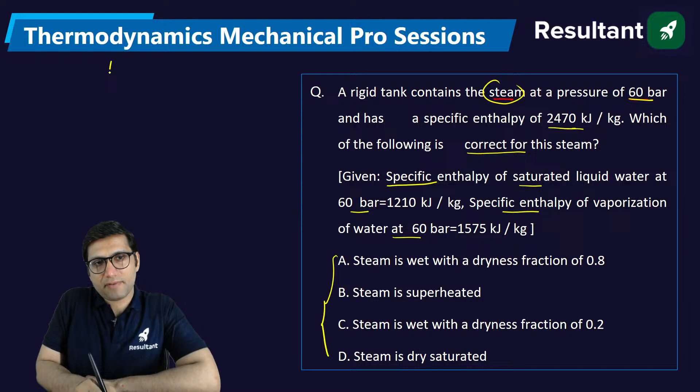First of all, we need to understand that we have a tank, and that tank is containing steam at a pressure of 60 bar, and the total enthalpy of the steam is also given at this pressure, 2470 kilojoule per kg. But at the same pressure of 60 bar, as you can see, the specific enthalpy is also given for liquid and the specific enthalpy of evaporation. If these two data are available for you, that means we are talking about wet steam.

And the total enthalpy of the wet steam is given. So just apply this formula: total enthalpy is equal to enthalpy of the liquid plus X into HFG. This is the formula. With the help of this formula, you can get the value of dryness fraction. This is called dryness fraction.

2470 is equal to 1210 plus X into 1575. By solving this, you will get the value of X. X is called dryness fraction. And one thing is sure, that this is a wet steam.

This is not superheated and neither is it dry saturated, because dry saturated steam has dryness fraction equal to 1, and that is definitely not possible here. And superheated steam is not there because they have given this data. So find the dryness fraction. How much will it be? If you solve it, you will get 0.8. So the answer is coming out to be this.

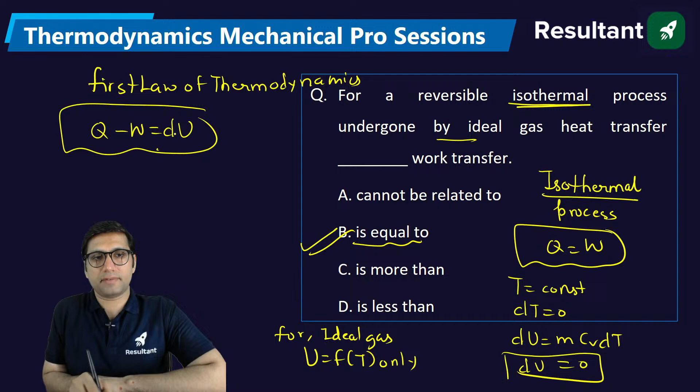Now from first law of thermodynamics, Q minus W is equal to dU. By using this first law of thermodynamics, we can say that if this is 0, then heat transfer is equal to work transfer.

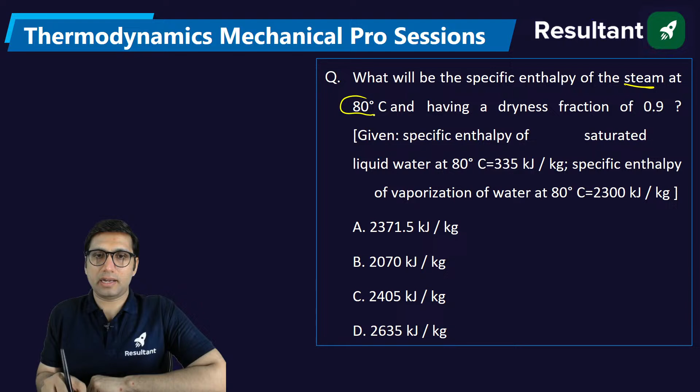Next question. What will be the specific enthalpy of the steam at 80 degrees Celsius and dryness fraction 0.9? At this same temperature, 80 degrees Celsius, specific enthalpy of saturated liquid is 335 and specific enthalpy of vaporization, HFG, is equal to 2300.

By using this data, can you just let me know the value of specific enthalpy of wet steam? It is HF plus X times HFG. Same formula that we have discussed, right? 335 plus 0.9 into 2300. Put the values, you will get the answer. Tell me what answer you are getting.

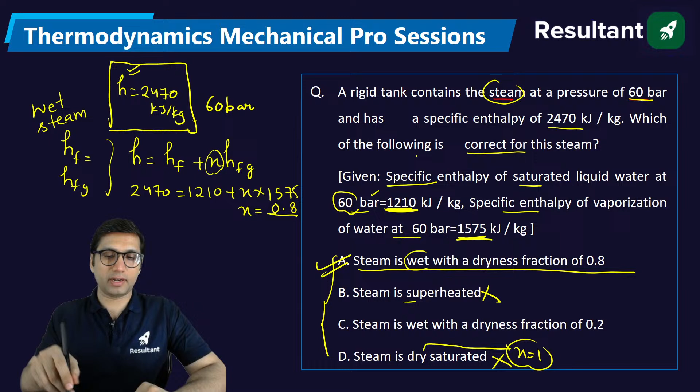Well, if you solve this, you will get a value around 2405 kilojoule per kg. A similar type of question we have discussed here. See, in both questions the same formula has been used. The only difference is what each one is asking.

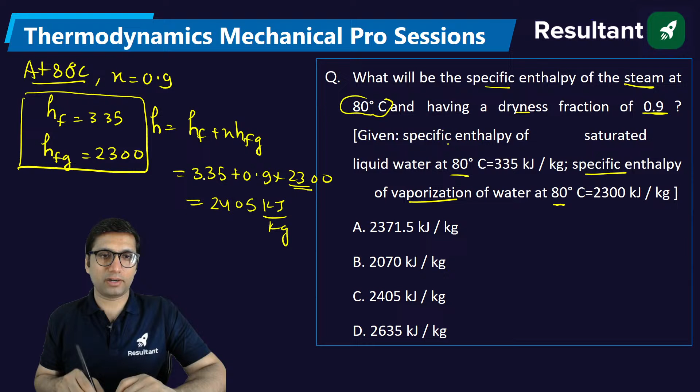2305 is not correct, Gaurav. It will be 2405. Please solve it correctly. It is already 2300. So if you multiply by 0.9 and add to 335, you will get 2405.

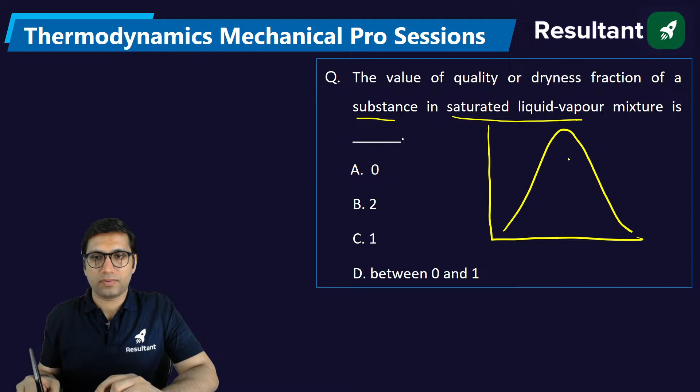The value of quality or dryness fraction of a substance in saturated liquid vapor mixture. This region is called the saturated liquid plus vapor mixture region. You have to tell what the dryness fraction will be.

Because this is called wet region, for the wet region or saturated liquid vapor mixture region, the dryness fraction is greater than 0 and less than 1, that means between 0 and 1. And this line is saturated liquid line.

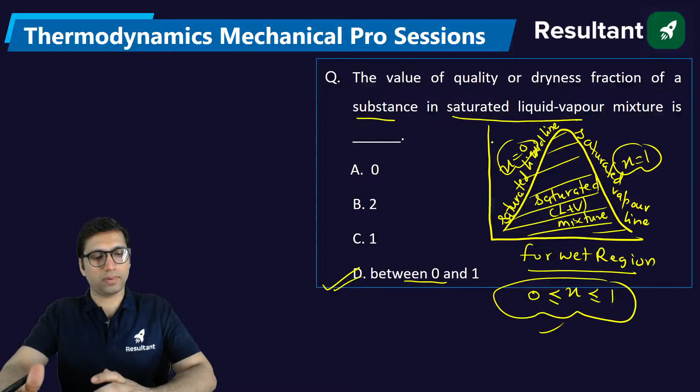This is saturated liquid line. This is saturated vapor line. On the saturated vapor line the dryness fraction is equal to 1 and on the saturated liquid line the dryness fraction is equal to 0. So this question can be asked in the exams about the dryness fraction.

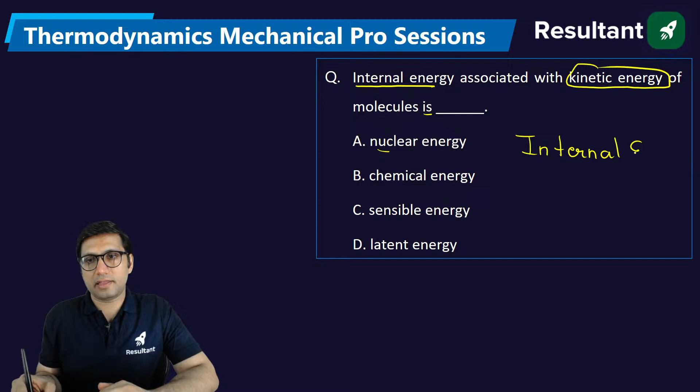Next question: internal energy associated with kinetic energy of the molecules is a form of nuclear energy, chemical energy, sensible energy or latent energy. First of all, what is internal energy? Internal energy is also called microscopic form of energy, right? It is microscopic energy.

But we need to understand one thing. If it is microscopic energy, then it is also called energy possessed by individual molecules. The energy possessed by each individual molecule is called internal energy, and in that we have different forms of energy. We have sensible, chemical, nuclear, right?

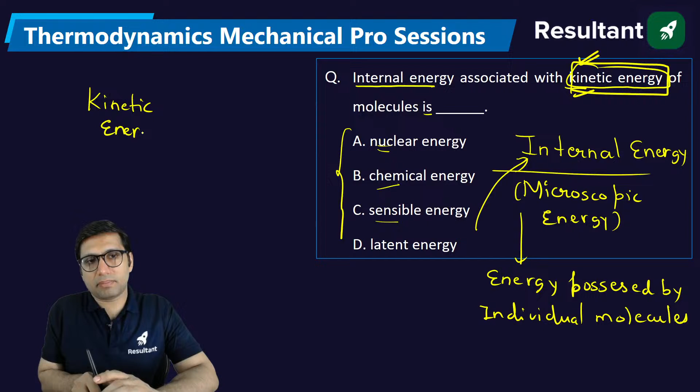But here it is asking for the one which is associated with kinetic energy. All these energies are forms of internal energy. They all come under internal energy. But related to kinetic energy, when we say kinetic energy of the molecule, then kinetic energy of the molecule is 3 by 2 kB into T.

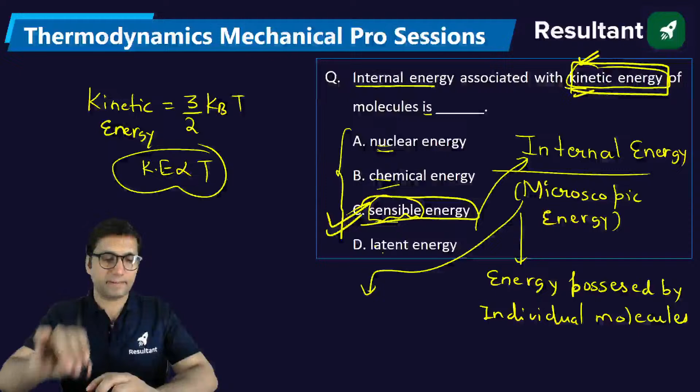Kinetic energy of the molecule is proportional to temperature, and temperature or temperature difference is basically called sensible energy. The reason is that internal energy associated with kinetic energy of the molecule is sensible energy, because internal energy can be of different forms - nuclear, chemical, sensible, latent - but the part related to kinetic energy will be sensible.

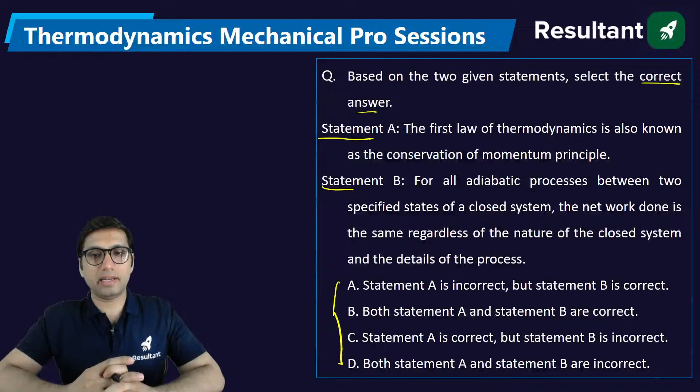There are 4 answers given here. The first says statement A is incorrect but statement B is correct. First law of thermodynamics is conservation of momentum - absolutely not, so the first statement is incorrect.

This is correct. Now you must be saying, sir, please check the second one. For all adiabatic processes between two specified states of a closed system - let's see that. Now we know that for an adiabatic process, heat transfer is equal to 0.

So work transfer will be equal to minus of dU, it will depend on internal energy change. It only depends on the initial and final internal energy, doesn't matter - although work is a path function, only for adiabatic process does it depend on a quantity which is not a path function, it is a point function. So this statement is correct, that net work done will be same regardless of the nature and detail of the process, only for adiabatic process.

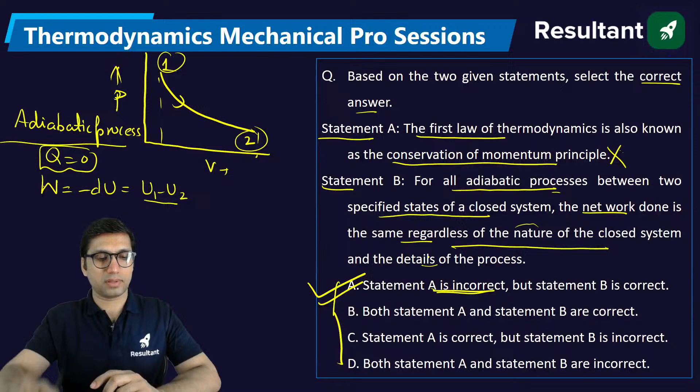An ideal gas thermometer based on this is called a constant volume gas thermometer. What do you mean by constant volume? That is, when volume is constant, pressure will be directly proportional to temperature.

So as per this we can say that the pressure of the gas at temperature equal to 0 degree Celsius is equal to P, and pressure at temperature equal to T degree Celsius is equal to P Tp. This is called the triple point, this is called the triple point scale.

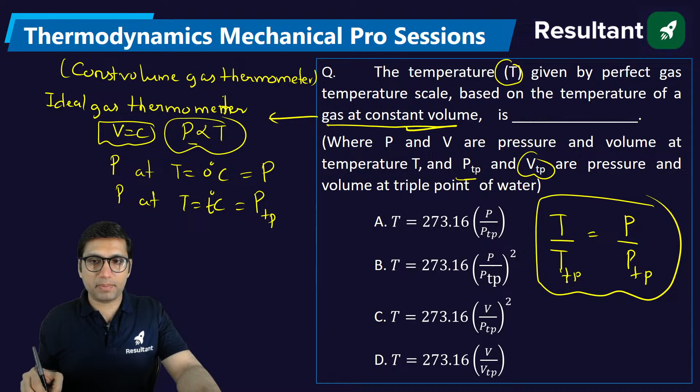Now at the triple point scale, you can relate this - we can say that pressure is directly proportional to temperature. So according to that, the temperature of the gas divided by temperature at triple point is equal to pressure of the gas divided by pressure at triple point. This will be the relation. Temperature at the triple point, T tp, means at triple point temperature is equal to 0.01 degree Celsius, which is equal to 273.16 Kelvin. Just put this value here, you will get 273.16 into P by P tp.

So the answer for this question will be option A. Those who have given option A as the answer for this question are absolutely correct.

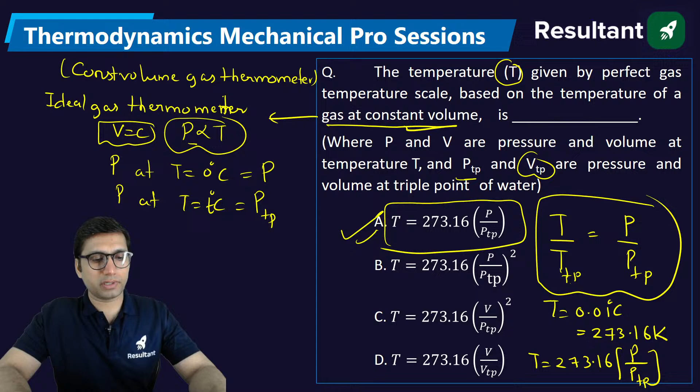Please make it bold, sir, it's not clear, it's not clear. Is it not clear? Gautam? I don't think it's not clear. What is not clear here - whatever I am writing, or whatever is written here, what is not clear?

First of all, we need to find the maximum work obtainable. We have a body which is at 600 Kelvin.

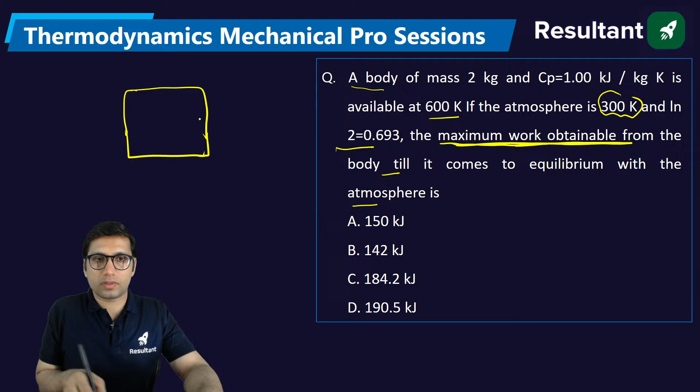The questions should be bold. I will try to make the questions bold, no problem. Kuldeep, good evening, welcome to the session.

This body is at 600 Kelvin, and the atmosphere around it will have a temperature of 300 Kelvin.

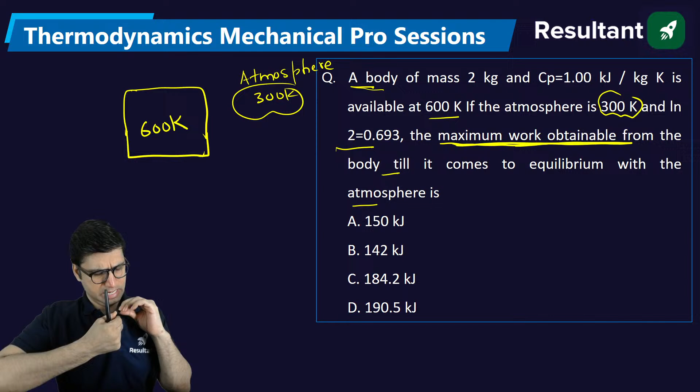After 23 minutes of session you are saying sound is less. Let me check. Is it less sound? Tell me.

So tell me what will happen to this body. This body will definitely lose heat. Body will lose heat to the atmosphere. Your body will get cooled down, right?

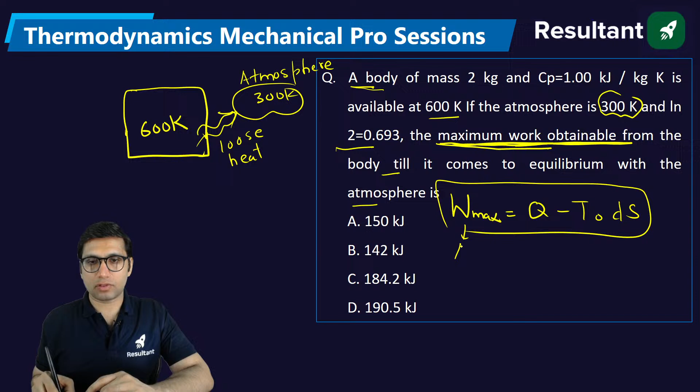Maximum obtainable work, maximum work is equal to Q minus T naught into ds. You must be thinking, sir, what is this formula or how have you applied this formula? I have applied this formula because this is the formula we apply here. This is the formula for maximum work, which is also called available energy. Available energy is equal to Q minus T naught into ds.

Because the body is a solid body, and for solids, entropy change of solids and liquids can be found by using this formula: m into specific heat, mass into specific heat, log of T2 by T1.

Although it should be T2 by T1, but since the body is losing heat, it will become T1 by T2. Here T1 is equal to 600 and T2 is equal to 300. But since the body is losing heat, there will be a minus sign, and the minus sign will go inside, so it will become T1 by T2.

And what is Q? Q is equal to MC into T2 minus T1. It should be T2 minus T1, but it will become T1 minus T2. So we can write MC into 600 minus 300, minus T naught into MC log of 600 by 300.

Clear? Now if I take MC common outside, you will get what? Tell me, it will be 300 minus, what is T naught? T naught is the surrounding temperature. This is 300 log 2. Clear? Mass is 2, Cp is 1. So just 2 into 1, 300 minus 300 into 0.693.

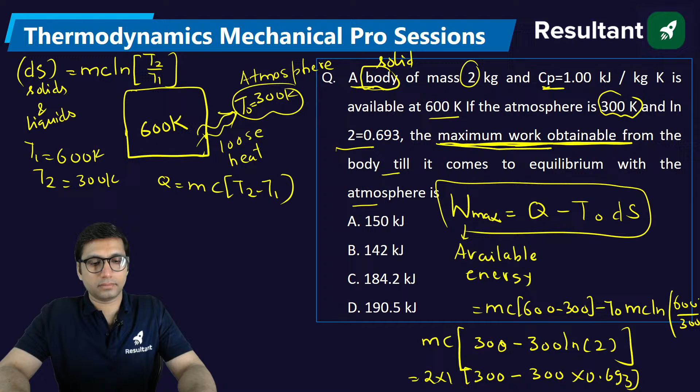Solve it and tell me the answer. Okay, if you solve it, you will get 184.2. Are you all getting this value? 184.2. Clear?

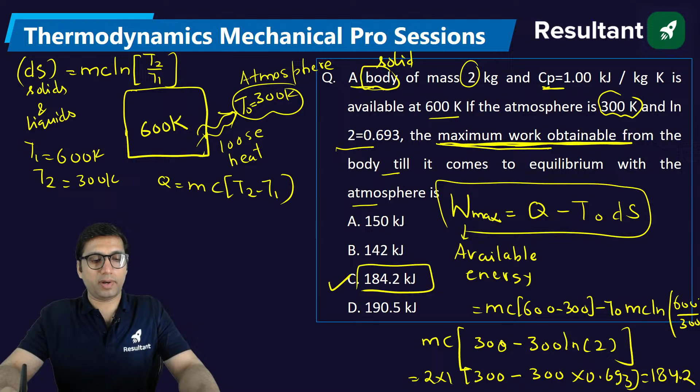Next, the equation which forms the basis of the Mollier diagram. First of all, what is the Mollier diagram? It is an enthalpy-entropy diagram. It is a plot between enthalpy and entropy, like this.

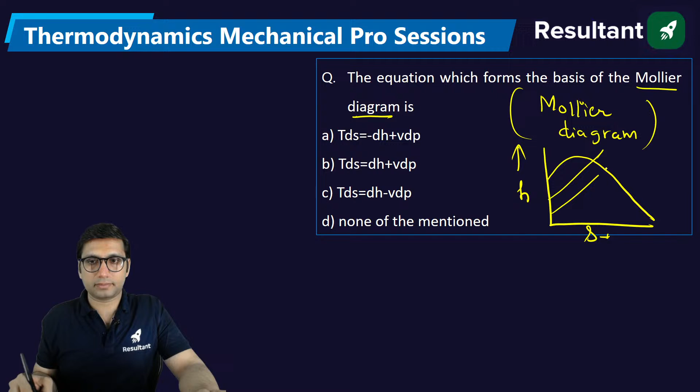One thing about the Mollier diagram is, the slope of the Mollier diagram is... what is the meaning of slope of a curve? It is change in the y-axis and x-axis. This at constant pressure is equal to absolute temperature. This is called the slope of the Mollier diagram.

But how? What is the meaning of the equation which forms the basis of the Mollier diagram? That means this slope, this relation, which of the following equations will give you this relation? This is the equation: TdS is equal to dH minus VdP. How? If we use this equation, TdS is equal to dH minus VdP.

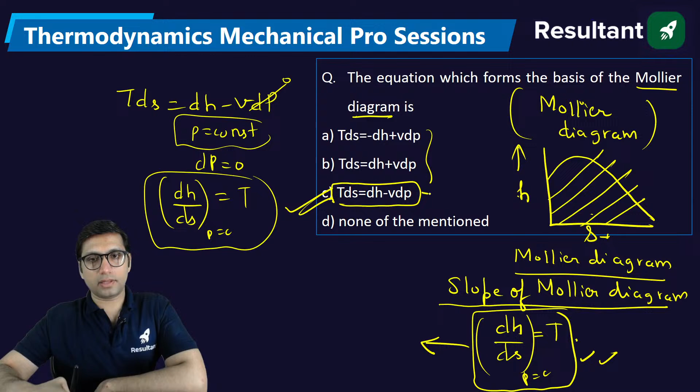If I take constant pressure, for constant pressure, change in pressure equals 0. If this becomes 0, we can say dH by dS at constant pressure is equal to T, where T is absolute temperature. So the relation which is the basis of the Mollier diagram, this slope, you get by using this TdS equation. It is also called the TdS equation.

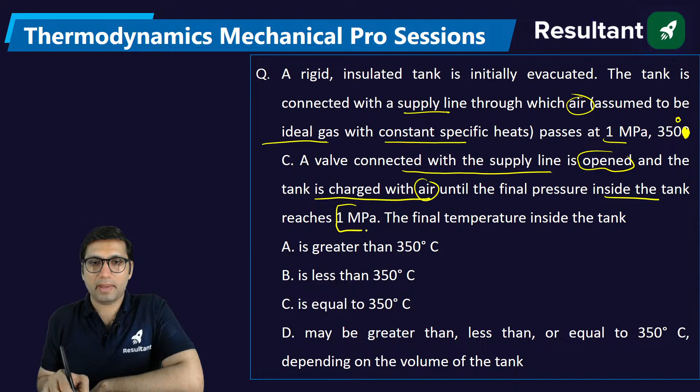A rigid insulated tank is initially evacuated. The tank is connected with a supply line through which air, which is assumed to be an ideal gas with constant specific heat, passes at 1 megapascal, 350 degrees Celsius. A valve connected with the supply line is opened and the tank is charged with air until the final pressure inside the tank is 1 megapascal, same as the initial pressure. You have to tell what is the final temperature inside the tank.

Will it be greater than 350 degrees Celsius? Will it be less than 350, equal to 350, or may be greater than, less than, or equal to 350, depending on the volume of the tank?

First of all, this case having a rigid insulated tank, initially evacuated, and asking the final temperature, this is a case of unsteady flow, and in unsteady flow it is a case of charging of a tank. If you have studied this topic, when the charging of tank is there, charging of an evacuated insulated tank...

Then the final temperature will of course be gamma times the initial temperature. Gamma is 1.4. If not given, you can take 1.4. So whatever the initial temperature, the final temperature will be more than the initial temperature. It will be greater. Clear? Clear, everyone?

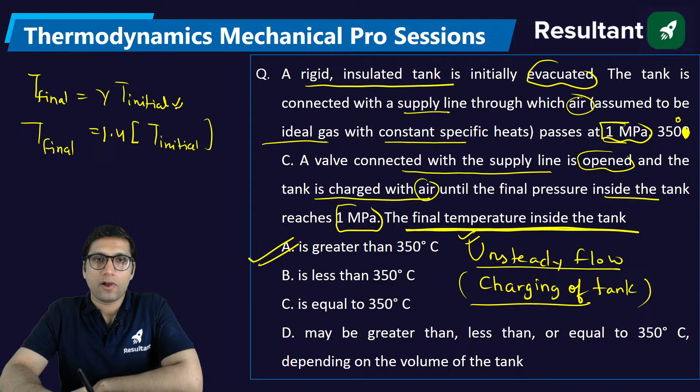So this equation, I think you must have studied the final equation for charging of a tank, an insulated evacuated tank - this will be the answer.

For an ideal turbine, enthalpy of the gas at entry and exit is 3000 and 2500 respectively, having velocity of 200 and 100 at entry and exit. If the mass flow rate of the gas is 30, the approximate power output of the turbine is?

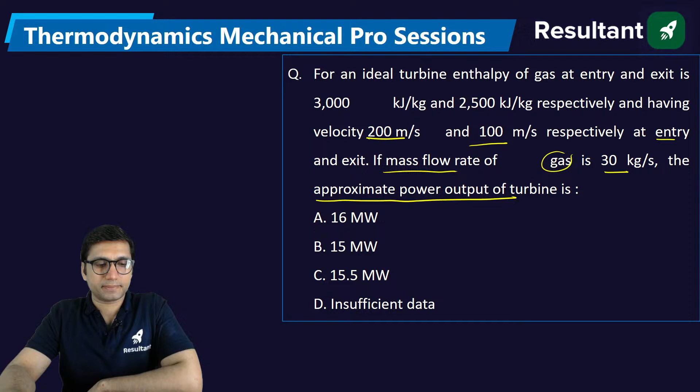How are you going to solve this question? Because the turbine works under steady state condition, we'll apply the steady flow energy equation.

A steady flow energy equation, if you apply, it is m*h1 plus v1 square by 2000 plus g into z1 by 1000 plus q is equal to m*h2 plus v2 square by 2000 plus g into z2 by 1000 plus w.

So if you just put the values here, this will be m(h1 minus h2) plus (v1 square minus v2 square) by 2000 is equal to power output.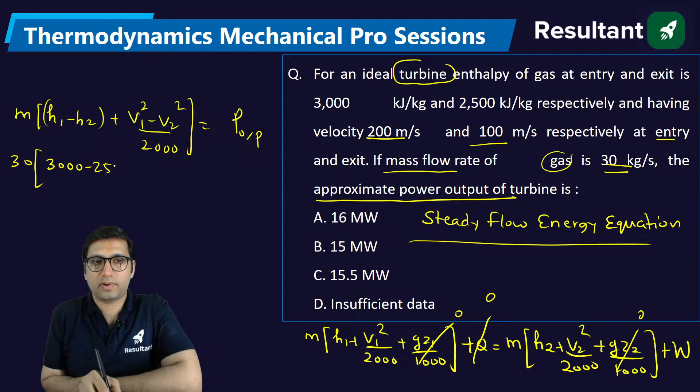Just put the values which are given here: this is 30, this is 3000 minus 2500, plus 200 square minus 100 square by 2000.

Solve it, you will get the answer - you will directly get power output. Tell me what answer you are getting. Some of you are saying 15.5. Yes, 15.5 is the answer.

So the power output will come out to be 15450 kilowatt, or 15.45 megawatt, approximately 15.5 megawatt. Clear? Is it clear to all of you?

These kinds of questions you can expect in your RRB JE or SSC JE CBT 2.

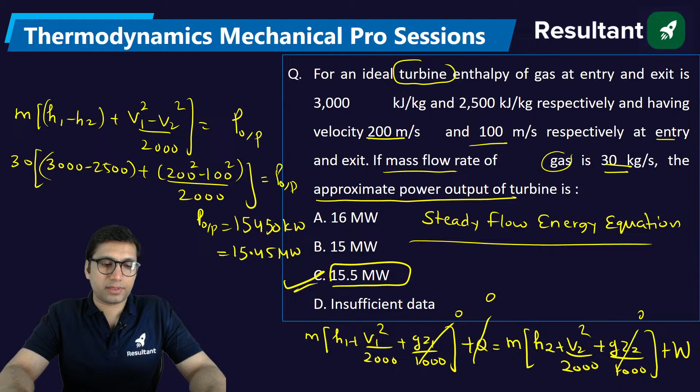A real gas as compared to an ideal gas at very high pressure occupies - more volume, less volume, same volume, or will it show unpredictable behavior?

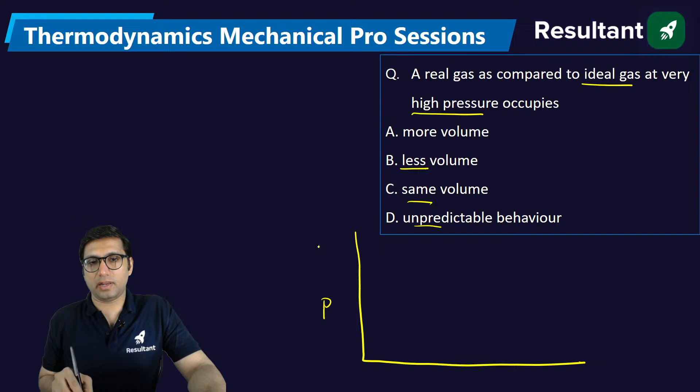So there is a graph plotted between real gas and ideal gas. The graph is somewhat like this - there is one curve for ideal gas, and this other curve is plotted for real gas.

Now there is a curve of pressure and volume. Tell me, at high pressure - this is the region of high pressure - if you draw a vertical line, this will be the volume of real gas, and this will be the volume of ideal gas. At high pressure, which has more volume? The volume of real gas will be more than the volume of ideal gas at high pressure. So, real gas compared to ideal gas occupies more volume at high pressure.

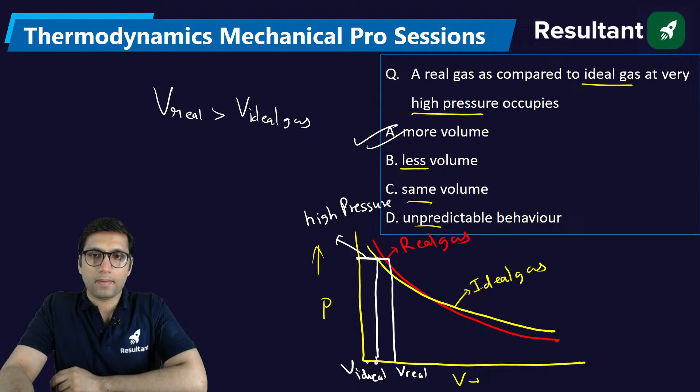A real gas undergoes an isothermal process. Which of these statements are true? Real gas undergoing an isothermal process, which is a constant temperature process - which of these statements are true?

For isothermal process, we know temperature is constant, so you would say temperature change will be 0, du will be 0, right? This is true for ideal gas - this whole story will be true for ideal gas, where heat transfer will be equal to work.

But what about real gas? Here they are saying real gas. For real gas, only one thing is true: real gas internal energy is a function of temperature and volume both, not just a function of temperature. So we cannot say that du will be 0 - du will not be equal to 0.

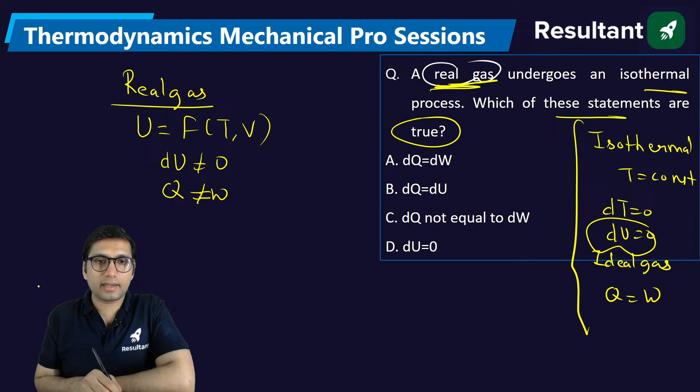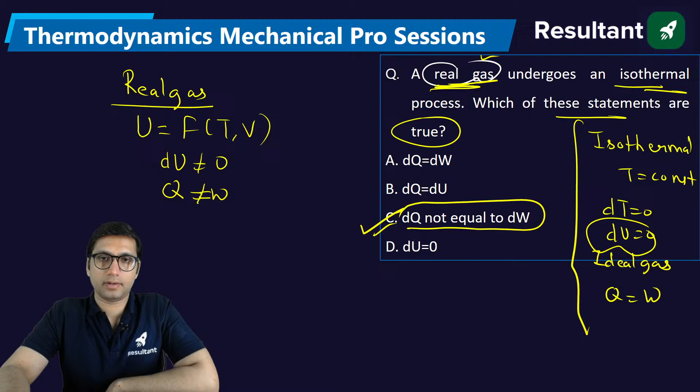And if that is the case, then heat transfer will not be equal to work transfer. But one thing we can say out of the options given is: heat transfer will not equal work transfer for a real gas under constant temperature process. For ideal gas, this should have been true, but for real gas, this is not true. So the only correct option here is option C. Is it clear to everyone?

Which of the following statements is incorrect with reference to the first law of thermodynamics? You don't have to tell the correct one, you have to tell the incorrect one.

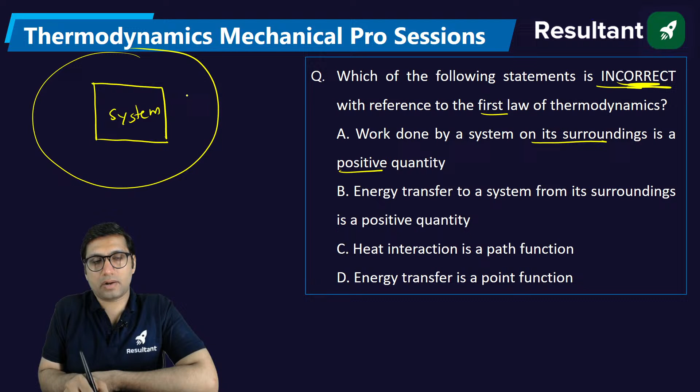If you see the option A, work done by a system on surrounding is positive. When the system does work on the surrounding, it is a positive value. This is a system, and outside the system is surrounding. If the system does work on surrounding, it is positive work. Work is positive. Correct. This is correct. But you have to tell the incorrect.

Energy transferred to a system from its surrounding is a positive quantity. Okay, this is also correct. When we say energy transfer, see, energy transfer can be heat transfer, work transfer, both. But here it is to a system from surrounding. Okay, when we say energy in transit, there are two types of energy that you study, that is heat and work.

And these energies in transit, heat and work, cannot be point functions. They are not point functions. They are path functions. Heat and work are path functions. Okay. So this statement is not correct. They are asking about the incorrect. So that is not correct. Okay.

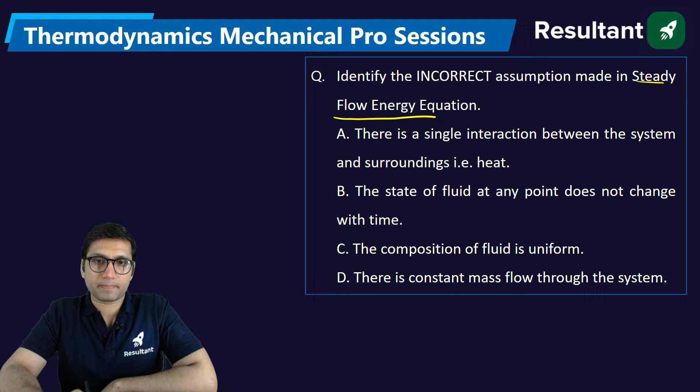Identify the incorrect assumption made in steady flow energy equation. Steady flow energy equation you must have studied. There is an equation which we have used in the previous question, I think, to solve a question on turbine. Identify the incorrect assumptions made in steady flow energy equation. There are two major assumptions that we use.

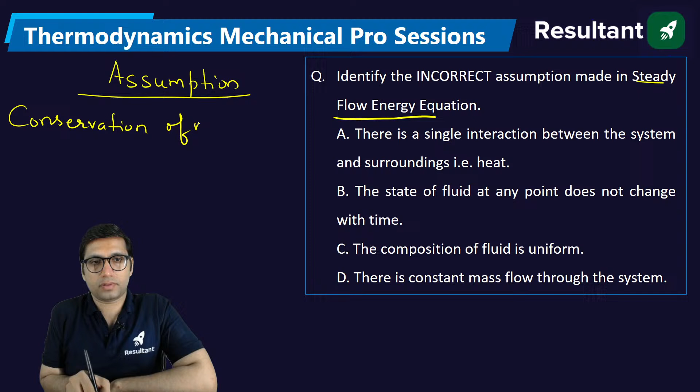One assumption that we use is conservation of mass. Mass is conserved. This is one assumption. And second is conservation of energy. This is the second assumption that we use for steady flow energy equation. These are the two important assumptions. But you have to tell the incorrect. There is a single interaction between system and surrounding, that is heat. This is a wrong statement, because it's not that there is just a single interaction. Okay. All right.

So Pradeep, we can discuss about that. We can discuss privately. You are asking about a private job. We can discuss it privately, because here I am teaching the students to prepare for government jobs. So if you have any such plan to get into a private job, then we can discuss this privately. There can be many depending on where you want to work, what your qualifications are, and what your areas of interest are.

Okay. This is a single interaction between system and surrounding. No, there can be two interactions, heat and work. It is not that system and surrounding can interact only by heat. There can be work interaction also. Okay. The state of the fluid at any point does not change with time. This is the assumption of steady. In steady flow, this is exactly what steady means. The meaning of steady is that

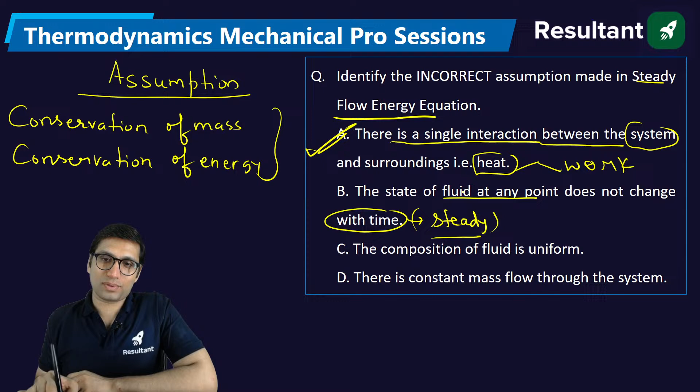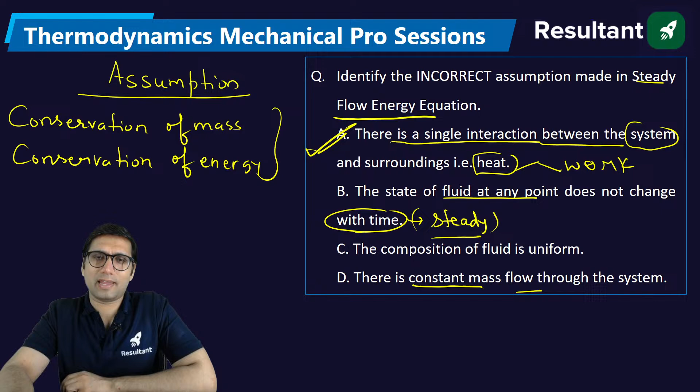Okay. So the state of the fluid at any point does not change with time. A constant mass flows through the system. Yes, conservation of mass, conservation of energy, and steady state conditions. And all types of interaction can take place. It's not just heat and work. There can be enthalpy change, there can be internal energy interaction.

Okay. Which of the following statements is false about constant volume gas thermometer? Constant volume gas thermometer traces the increase in temperature with the change in pressure. Because we are saying constant volume gas thermometer, it will be based on Gay-Lussac law. And as per the Gay-Lussac law, if the volume is constant, the pressure will be directly proportional to temperature. Okay, so this is correct.

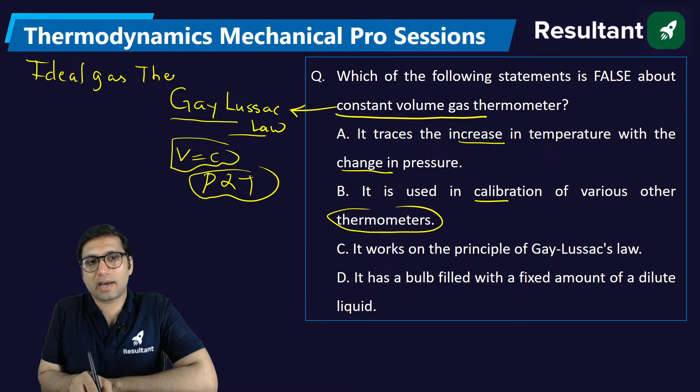It is used in calibration of various other thermometers. Yes, that is correct. Why? Because it is an ideal gas thermometer. And ideal gas thermometers give you correct readings, because they are based on an equation, they are based on a law. Because they are well calibrated, their reading is more accurate, so they can be used for calibration.

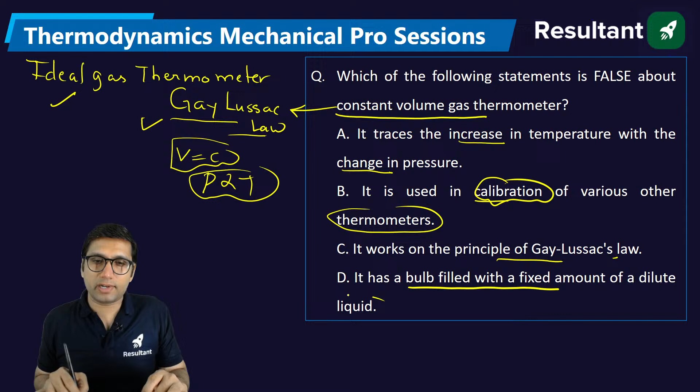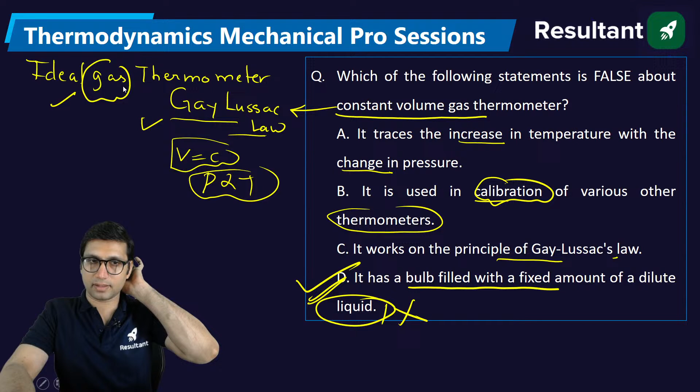Calibration means a standard to check the value. Suppose you have made a new thermometer, whether the value you get from it is correct or not can be checked using this thermometer, because this will give you the correct reading for sure. Okay. It works on the principle of Gay-Lussac, that is also correct. It is a bulb filled with a fixed amount of dilute liquid. No, it does not contain liquid. This is false, because it contains a gas, not liquid. It contains ideal gas. So this is the wrong statement.

Which of the following is a required condition for heat to be transferred across a boundary? Heat to be transferred across a boundary, internal energy.

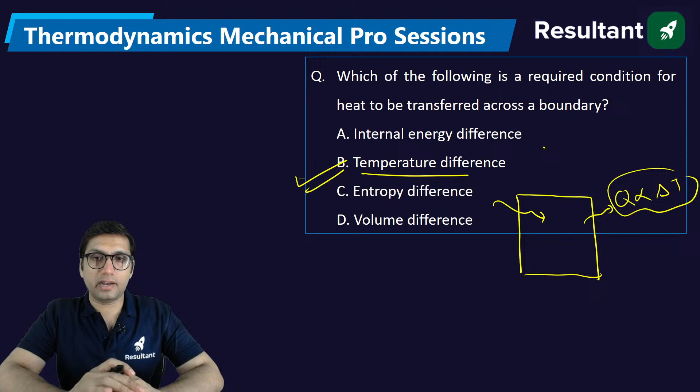As you know, heat transfer is the transfer of heat across a boundary. Generally when we say heat transfer, we're talking about sensible heat transfer, which depends mostly on temperature difference. There should be a temperature difference in order to have heat transfer. Okay, for heat transfer to happen you should have a difference of temperature between system and surrounding.

Which of the following statements is incorrect? Internal energy has an indefinite value for every state of a thermodynamic system. Internal energy of a perfect gas is a function of temperature only. Increase or decrease in stored energy of a system is numerically equal to the difference of net heat and work interaction. Internal energy is a property. First of all, if you see the first statement, it has an indefinite value for every state.

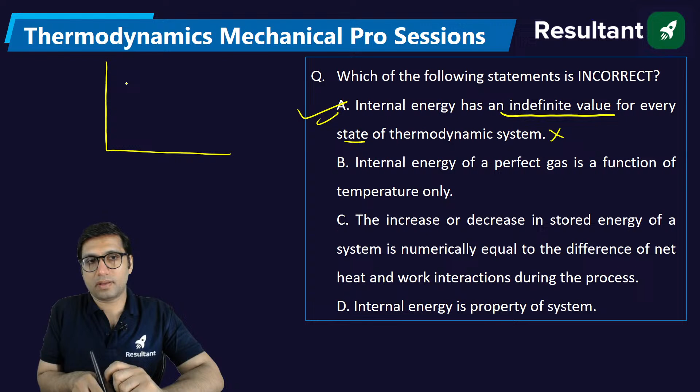This is the only incorrect one, because if there is a process taking place from state 1 to state 2, the system has executed a process. It is saying it has an indefinite value. No, it has a definite value, because at state 1 its internal energy will be U1, and at state 2 its internal energy will be U2. It will have a definite value. Okay, all the other points are correct.

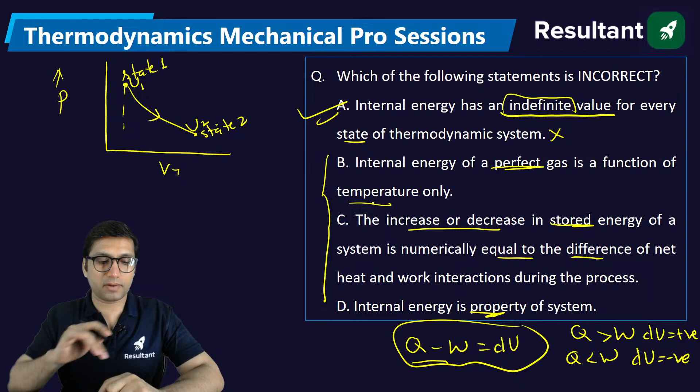Increase or decrease of internal energy depends on heat and work interaction. If the heat transfer is greater than work, internal energy will increase. If the heat transfer is less than work, internal energy will decrease. So increase or decrease of stored energy depends on the difference of Q and W, right? Internal energy is a property, yes, and for a perfect gas it's a function of temperature. But statement A is incorrect.

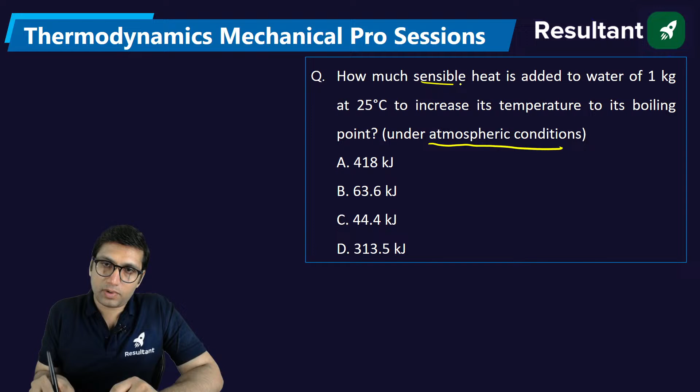How much sensible heat is added to water of 1 kg mass at 25 degrees Celsius to increase its temperature to its boiling point? Please read the question carefully and use your brain. Which heat are they asking? Sensible heat. And sensible heat depends on temperature difference. So we are trying to heat the water from 25 degrees Celsius at 1 atmospheric pressure to the boiling point by supplying sensible heat.

So tell me, what is the boiling point of water at 1 atmospheric pressure? It is 100. Only those who know the boiling point of water is 100 at atmospheric condition can answer the question. So sensible heat is mc delta T; sensible heat depends on temperature difference. Here the temperature difference is 100 minus 25. Mass is 1, specific heat of water is 4.18, and delta T is 100 minus 25. Just solve it and we'll get the answer.

Yes, it will be 313.5 kilojoule. Option D. Are you getting this value, everyone? Okay, very good.

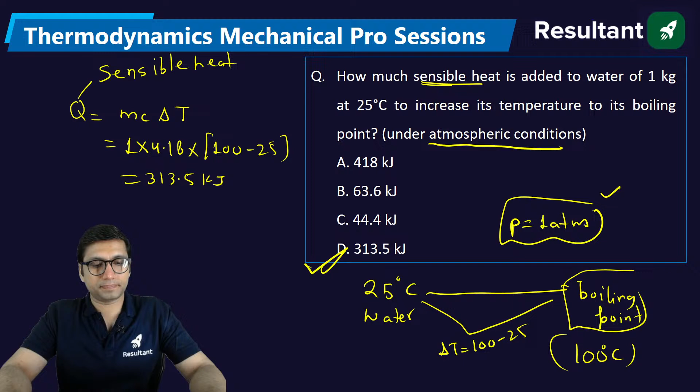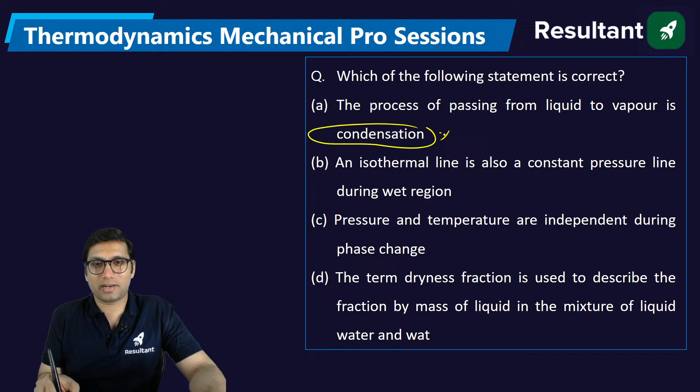Next question, which of the following statements is correct? The process of passing from liquid to vapor is condensation. Liquid to vapor phase change is called condensation. This is obviously not correct. Liquid to vapor is boiling or evaporation, or you can call it vaporization, not condensation.

Okay. An isothermal line is also a constant pressure line during the wet region. Wet region means the two-phase region of any curve. Let's say these are the constant pressure lines, and this is the temperature-entropy curve. It is very obvious that from this point to this point temperature will increase. In this region temperature is constant and pressure is also constant. In this region temperature will increase.

But here they are saying an isothermal line, meaning a constant temperature line, is also a constant pressure line during the wet region. Yes, this is the wet region. In the wet region, the line which shows constant pressure also shows constant temperature. If you see the other options, it's not that once we've got our answer we won't look at the other options. See what the other options say.

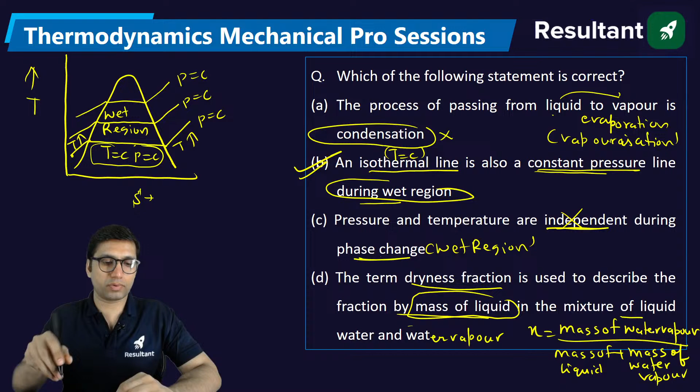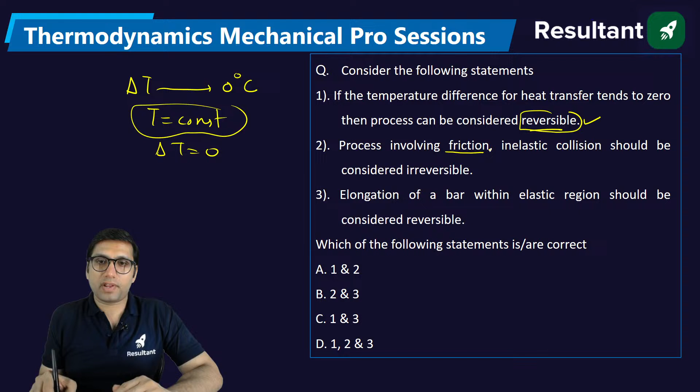Process involving friction and inelastic collision should be considered irreversible. जहां पे friction वहां irreversible.

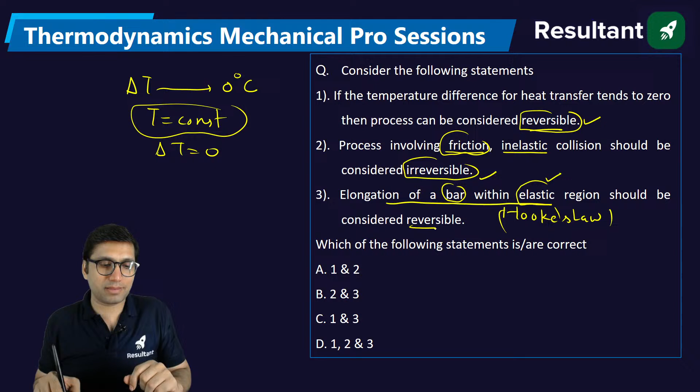Correct. Elongation of bar within elastic region. You must have studied Hooke's law. Hooke's law says that within the elastic region, if you elongate any bar by applying stress or load on it, and as soon as you remove the load, that object will again regain its original shape, right? So elongation of bar within the elastic region should be reversible. Yes. So all these statements are correct. Yes.

Dash connects the saturated liquid line and saturated vapor line. Which connects saturated liquid and vapor line? So saturated liquid line is this. Saturated vapor line is this. And which is connecting these two lines? These two lines are connected at a point. This point is called critical point. Critical point is the point of intersection of these two lines, saturated liquid and saturated vapor.

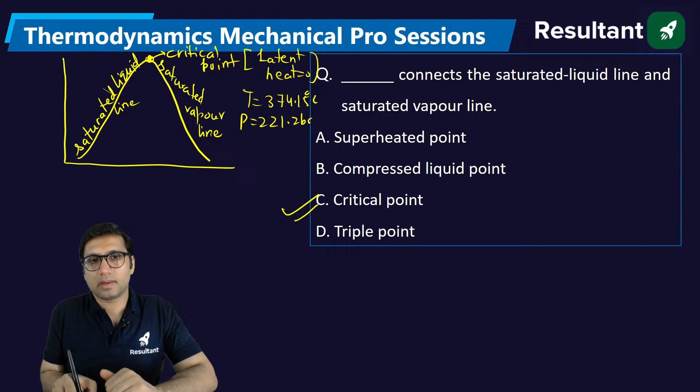And at critical point you find few things, that is latent heat of vaporization becomes 0. For water, the critical point temperature is 374.15 degrees Celsius and pressure is 221.2 bar. So few important things about critical points you should know.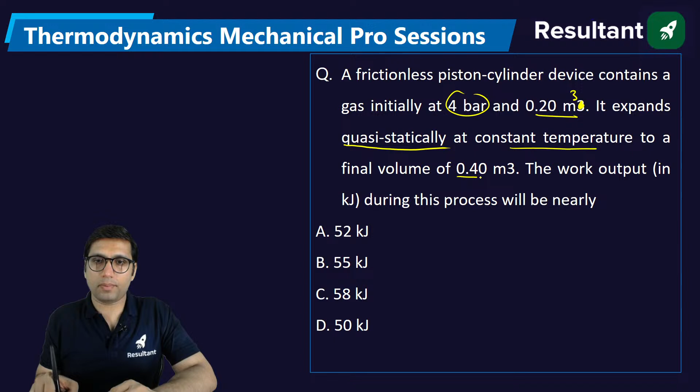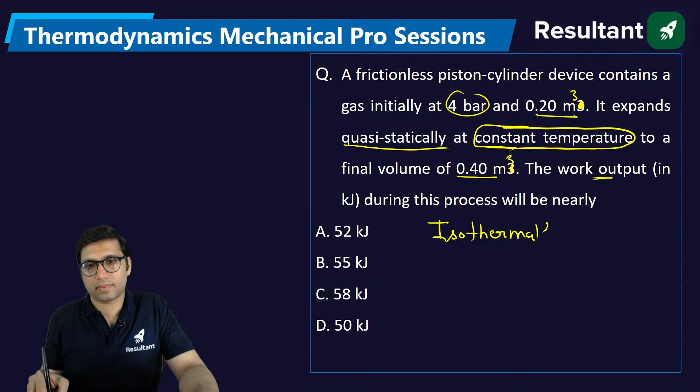So it is a constant temperature process, an isothermal process. When temperature is constant, work is equal to P1 V1 log of V2 by V1. Initial pressure is 4 bar, and 1 bar is equal to 100 kilopascal. You must be thinking, why are you telling me this, sir? Because you have to get the answer in kilojoule, and the only way is by converting the pressure in kilopascal. Because only kilopascal into meter cube will give you that.

Pascal is Newton per meter square, into meter cube, this will be kilonewton meter. This is kilojoule. That is the reason we need to convert this into kilopascal. So it will be 400 into 0.20 log of 0.40 by 0.20. You will get this as log 2, and log 2 is 0.693. Put the value, you will get the answer.

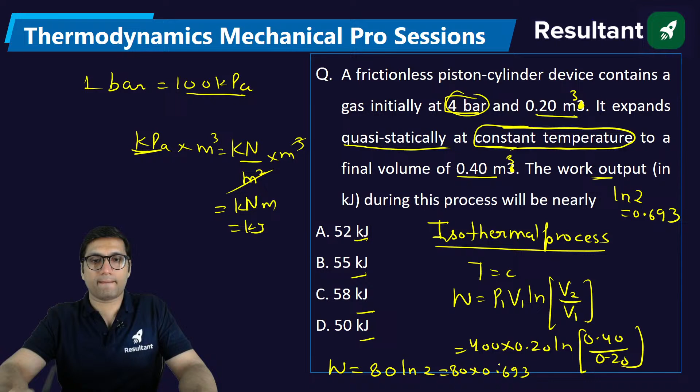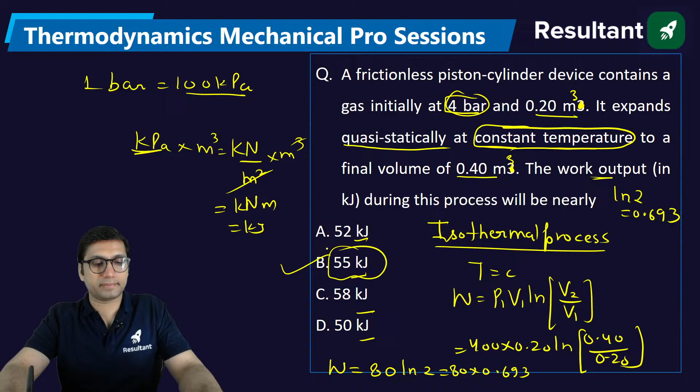The work will be equal to 80 log 2. That is 80 into 0.693. What will the answer be? Tell me. 0.693 into 80, it will be 55.4, about 55 kilojoule. Clear? Next question.

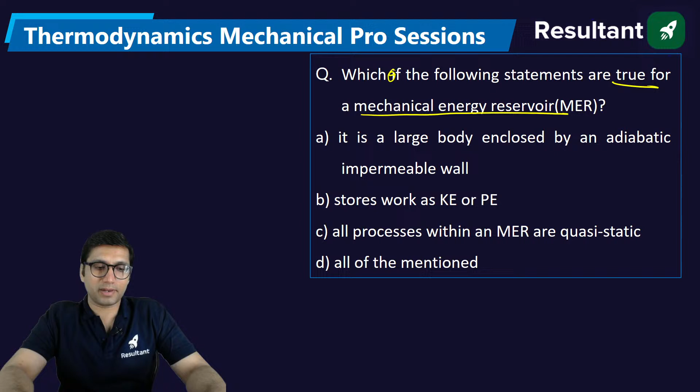Which of the following statements are true for a mechanical energy reservoir? What is a mechanical energy reservoir? You must have studied a thermal energy reservoir, like source and sink in heat engines. Here we are talking about mechanical energy reservoir. A large body enclosed by an adiabatic impermeable wall is a mechanical energy reservoir. It stores work as kinetic energy or potential energy, like flywheel.

You must have heard about flywheel used in the engine. It rotates when additional energy is provided, stores that energy, and when needed, it will supply the energy. Spring. A spring has potential energy stored in it, and when you press the spring and release it, it provides that stored energy. That is a mechanical energy reservoir. All the processes within a mechanical energy reservoir are quasi-static. Okay, so all these statements are correct.

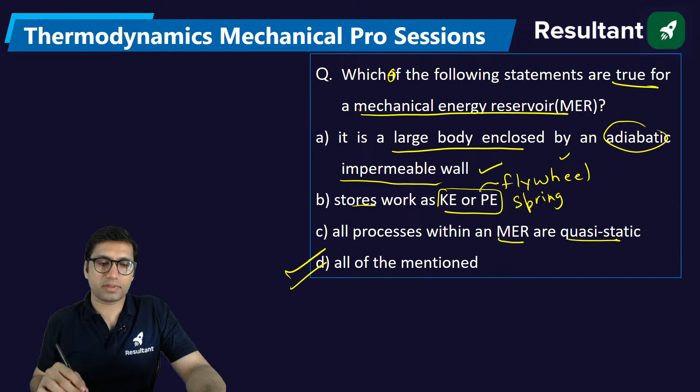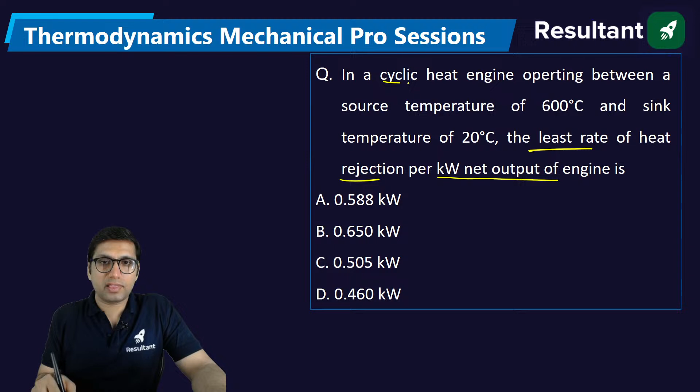In a cyclic heat engine operating between a source temperature of 600 and sink temperature of 20, the least rate of heat rejection per kilowatt net output of the engine is? Can you tell me which engine will give you least rate of heat rejection? Efficiency, have you heard about efficiency? 1 minus heat rejected by heat supplied. If you want the heat rejection to be least, only one engine will give you that, which is a Carnot engine, because only the Carnot engine efficiency is maximum.

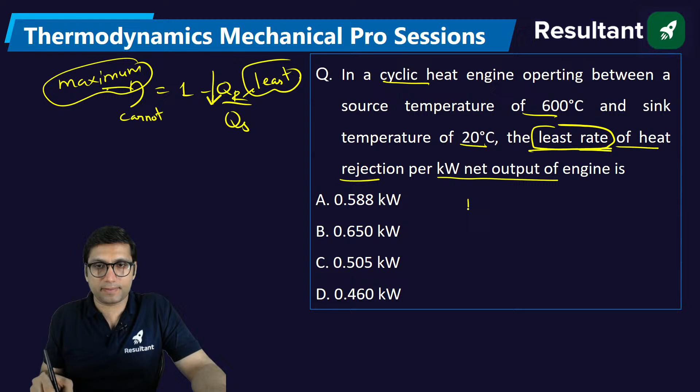And why it is maximum? Because if the heat rejection is least, the efficiency will be maximum, and that is only for Carnot. So we have to assume it is a Carnot engine. That is why it will give you the least rate of heat rejection. And for a Carnot engine, efficiency is 1 minus lower temperature by higher temperature. So it will be 1 minus 293 Kelvin divided by 873. You will get the efficiency from here.

Efficiency will be equal to work output by heat supplied. Least rate of heat rejection per kilowatt net output, that is for 1 kilowatt. If work output is 1 kilowatt, what is the heat rejection? By putting the efficiency, you will get heat supplied, and then you will get heat rejected: heat supplied minus work. Tell me what answer you are getting. Tell me, everyone.

Yes, don't go anywhere. After this we'll take just one more question. I know you guys have given so much time, 1 hour, so just wait for a few more seconds.

So efficiency will be around 0.665, and heat supplied will be 1.503 kilowatt, and heat rejection will be equal to 1.503 minus 1, that is 0.503. That is option C.

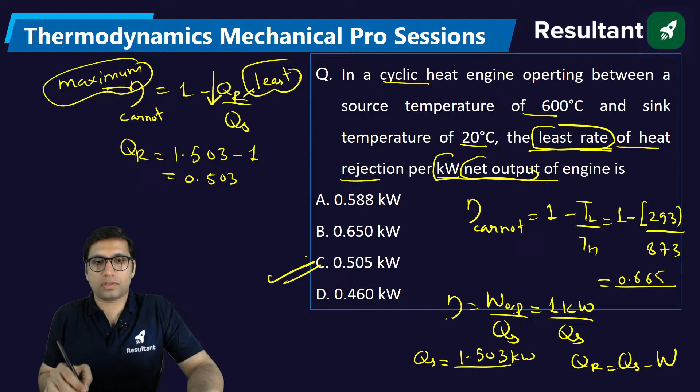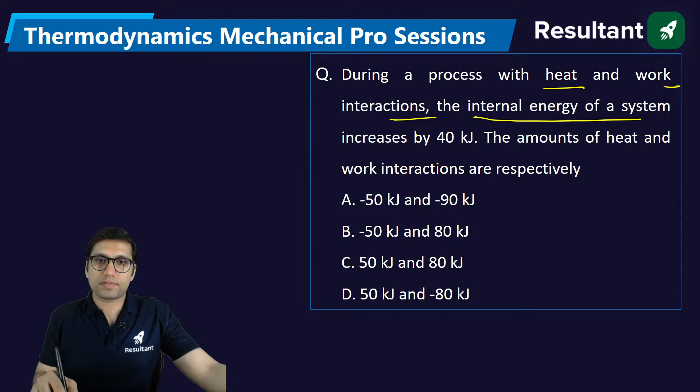Last question for today's session, and it's an easy question for you guys. During a process with heat and work interaction, the internal energy of a system increases by 40, and the amounts of heat and work interaction are? How can you solve this question? Very difficult. Two unknowns. Heat is unknown and work is unknown. Only one thing is known, that du is positive, plus 40.

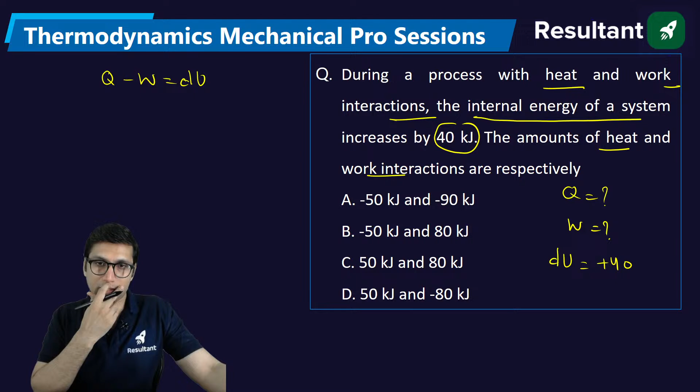Tell me. See, few questions have to be solved by options. There you can see heat and work. This is the heat part and this is work. Just put the value of all the options: heat transfer, work transfer.

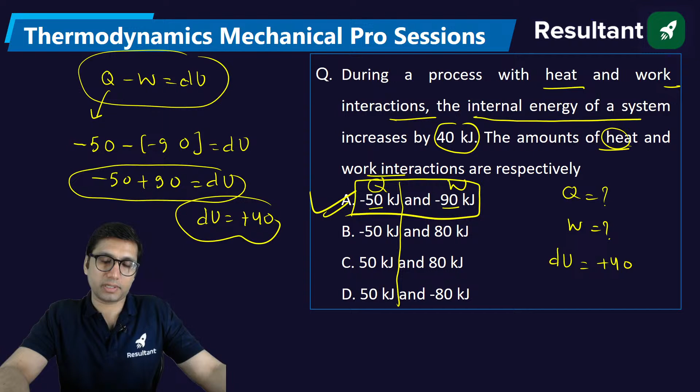If you put the values, minus 50 minus of minus 90. If you put option A, you will get minus 50 plus 90. You will get du equal to plus 40. Are you getting this by using the first option? Yes, by using the first option you are getting this value. So by the options you can solve this question. The rest of the questions will be taken in some other sessions.